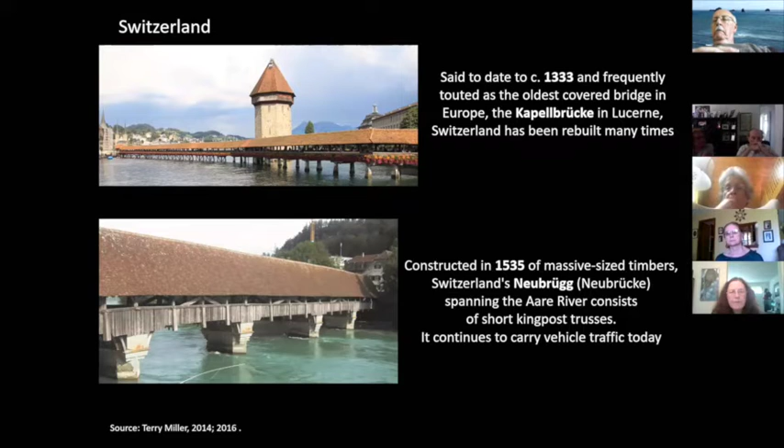Now, probably the two most celebrated covered bridges in Europe are in Switzerland, but Switzerland has more covered bridges than any country in Europe, even though other countries like Germany, the northern part of Italy, Austria, the Czech Republic, and Romania all have covered bridges today. These are not as well known or as well studied as North American covered bridges.

It may come as a surprise to you that actually the first evidence of covered bridges in the world is in China. We have archaeological evidence in China of a covered bridge 2,000 years ago. That's a long time ago.

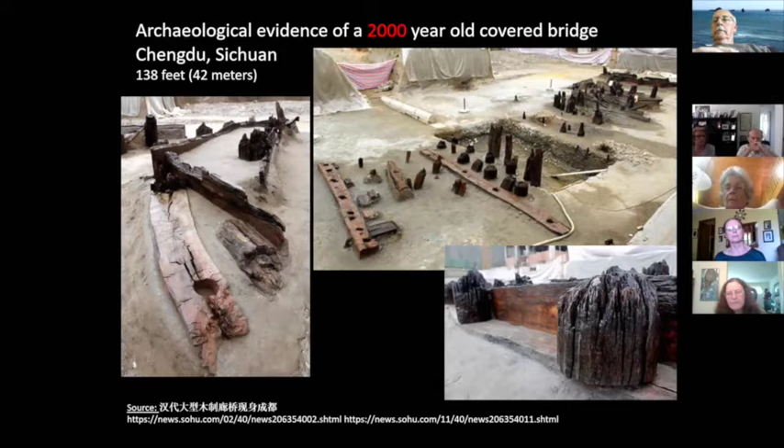I should tell you, my specialty really is Chinese covered bridges, and my book on China's covered bridges will be out in the United States sometime later this month. The earliest covered bridges emerged in China. This is archaeological evidence. Now, the oldest covered bridge in China actually dates to 1490, the end of the 15th century.

Now here, let's get to North America. It's debatable as to how many covered bridges there once were in North America. Some bridges were built, they were destroyed, they were rebuilt, they were destroyed, they rebuilt again. So there are many generations of some bridges, but some experts say there may be as many as 10,000, some even say 15,000 covered bridges built in the United States and Canada.

Well, first of all, you're going to say, Canada? Canada has covered bridges? Yes, Canada has quite a few covered bridges.

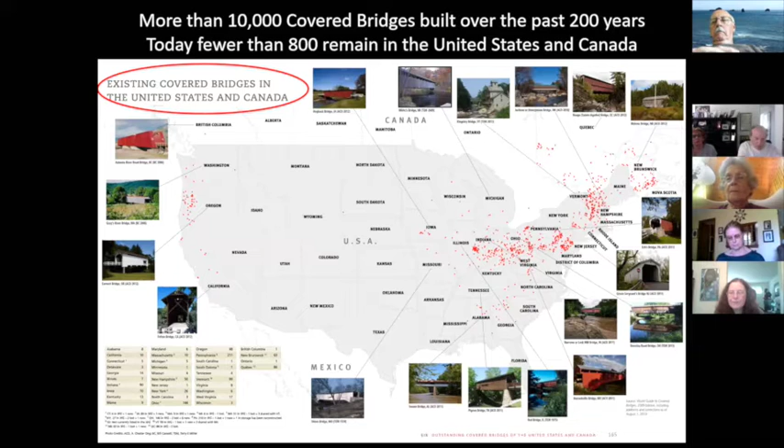And while I've done this with audiences in the past, I've asked them which state has the most covered bridges. Most Americans, almost anywhere that you are, will say Vermont, New Hampshire, something of that sort. But actually, the most covered bridges are found today in Pennsylvania and Ohio. Vermont comes third, Indiana has a lot, and New York has about 33 of them.

There are two provinces in Canada that actually have covered bridges, Quebec and New Brunswick, with 86 and 63, really quite a few. And you can see these dots on this map that show the contemporary distribution of covered bridges in the United States and Canada.

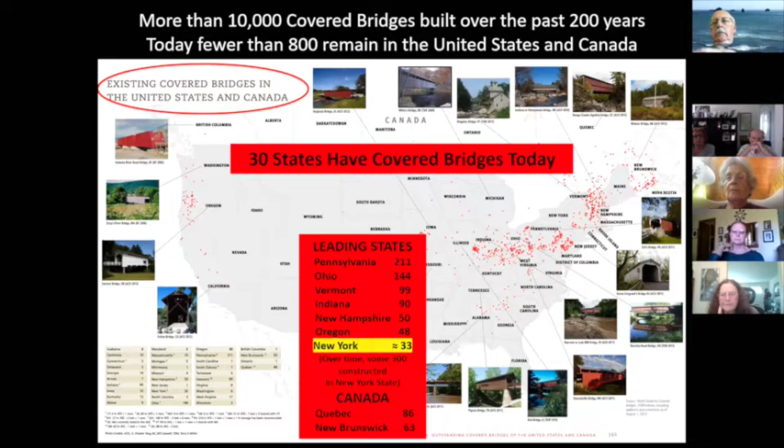And there are 30 US states that have covered bridges. Some of them only have one. And there are 4 Canadian provinces that have covered bridges. So covered bridges are found everywhere, but there are an awful lot of Americans who have never seen a covered bridge. I'm sure all of you have seen covered bridges.

The specialists I know in Ohio have said, well, we have more documented covered bridges because we have looked harder for our covered bridges. So they have found records of covered bridges that help account for this number, while other states like Pennsylvania and New York have really not accounted for their covered bridges in the same way.

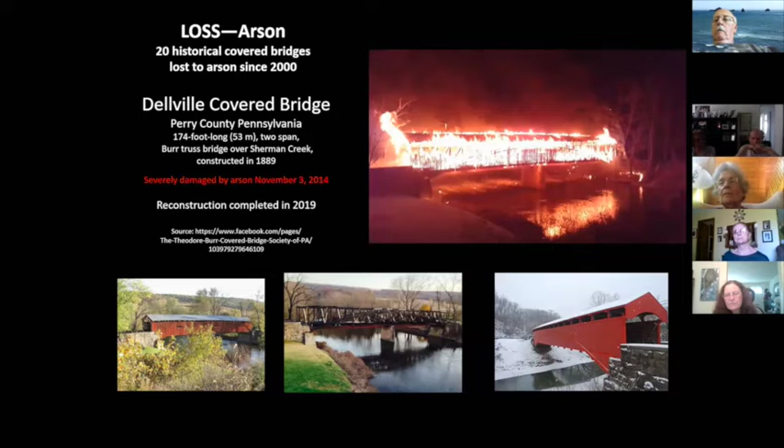Here's a picture of a Pennsylvania bridge that was lost to arson. This bridge was severely damaged in 2014 and rebuilt in 2019 at great cost. Something like 20 historical covered bridges in the United States have been lost to arson. I doubt whether any of the remaining covered bridges in Sullivan County have fire retardant on the outside, though it's possible to get fire retardant paint that helps reduce arson damage. Once a bridge is lost to arson, the cost of replacing it is very, very high.

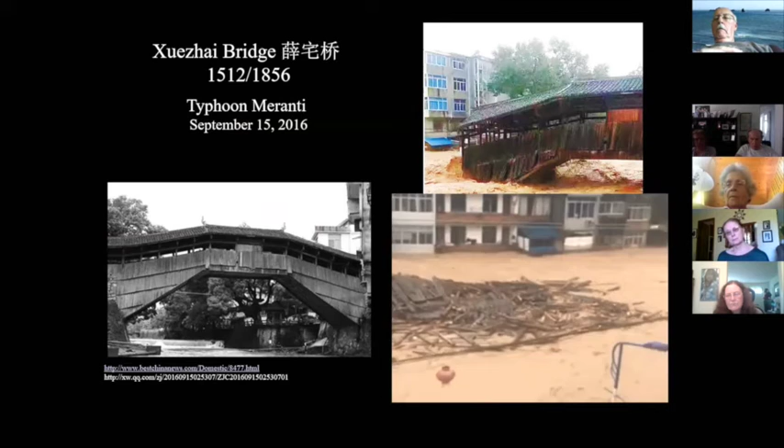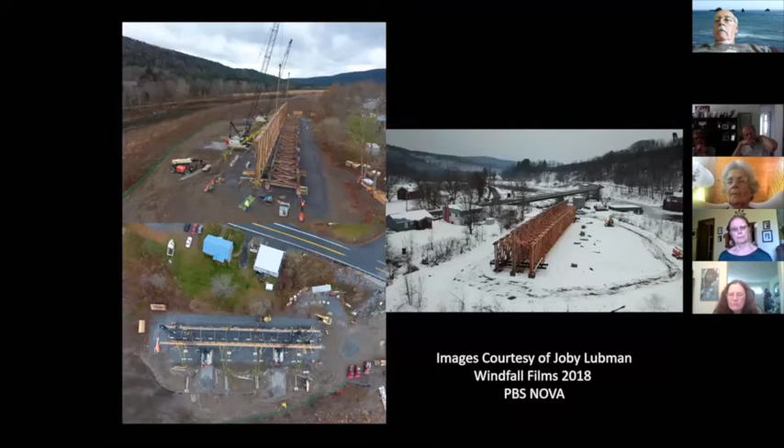This is when it was lost in 2011. Many will remember Tropical Storm Irene, which caused terrible damage in Ulster, Sullivan, and Schoharie Counties. In this case, it simply lifted the bridge up, carried it downstream, where it struck another bridge and was lost. The people in Schoharie County were devastated. Many wanted it rebuilt, but the cost was so great that FEMA objected. Ultimately, with a lot of political pressure, it was decided to rebuild the bridge, and it was rebuilt in 2018.

It looks like this today. It's a bypass bridge, meaning it's just for pedestrians now. It's been raised, so it's unlikely to be washed away again. This series shows you how the face, structure, and nature of a bridge can change over time, sometimes well documented and sometimes not.

Now let's step back. How did people approach bridges, streams, creeks, and rivers in the past? Well, fording was very important. Some of you may live in towns, as I do in New Paltz, where we have an old ford road that leads to an old ford.

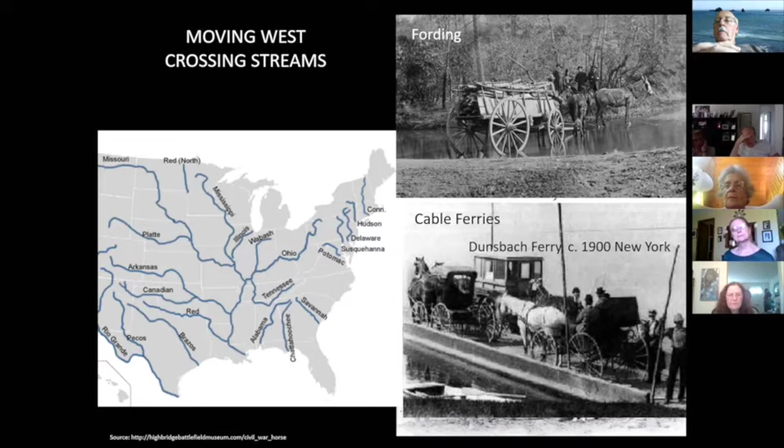There was, about the same time, the building of canals. We'll link some of this a little bit later.

Now, along the way, and you can find a lot of information in historical records about this, where people did not want to ford a stream, they began to build so-called beam bridges, simply taking a log, laying it across abutments, stone abutments on both sides, and creating a bridge that served a necessary purpose, and that if it got washed out, it could be replaced fairly quickly. And these are found all over the United States, not just simply in the Northeast, but all over the United States.

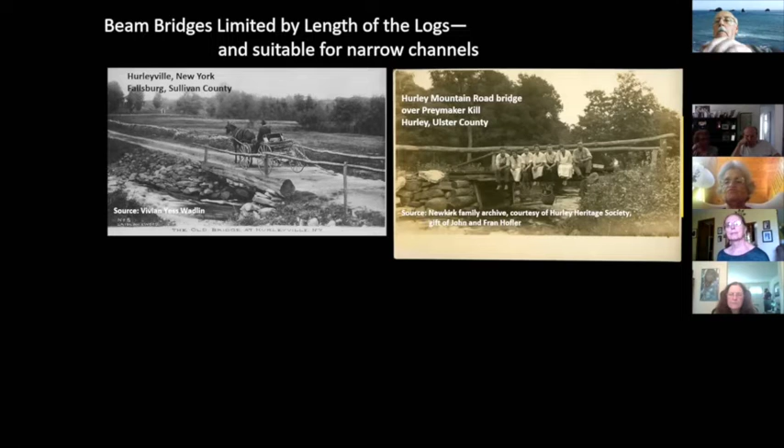Now, a fact of the matter is, trees can grow to great heights, but it's very rare to find a beam bridge that has a beam as long as, say, 60 feet, let alone 100 feet. Most beam bridges did not exceed anything more than about 30 feet. And beams sagged, beams rotted — nature conspired against using beams over a long period of time.

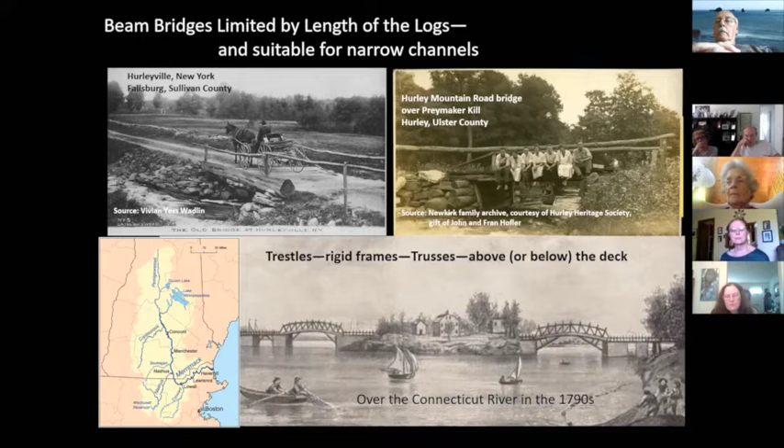Now, in the latter part of the 1700s, the 18th century, in New England, there were some individuals who began to experiment with ways of spanning a greater space, greater distance than, say, 30, 40, or 50 feet. And they did this by working with something that had been known very clearly in Europe. Carpenters knew this because they employed it in barns, churches, and the like, and that was using timber trusses. Timber trusses basically are structures put above a beam utilizing triangles to support the beam. Some people say to lift the beam.

And these are some of the common trusses on the left that were used: the so-called king post truss, the queen post truss, and the multiple king post truss. These were used widely in the world. Nobody invented them — they have been around a long, long time and employed by carpenters.

Then in the early part of the 19th century, American carpenters, who were very creative and inventive, began to design new types of trusses that would allow greater expanses to be covered than the king post, the queen post, or to some respects, the multiple king post. Each of these typically has a name. Some of the best known are shown here: the Burr truss, the Child's truss, the Howe truss, the Pratt truss, the Long truss, and the Town truss. We're going to see a lot of Town truss in Sullivan County in a while.

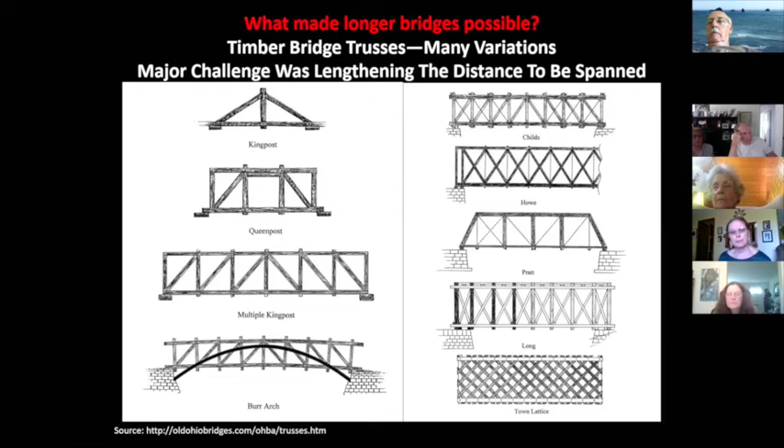Now, each of these trusses not only had a name, they were patented. In other words, those individuals went to the US Patent Office and patented their design with the expectation that those who would use their design would send some kind of royalty back to them. The fact of the matter is that a lot of the patents were ignored, and even if a carpenter was reasonably honest, he would tweak the design and say that it was his and it wasn't patented.

Now, it's useful right at this point to ask: why are covered bridges covered? Here's a picture of a covered bridge being built, the cover being put on. And the purpose of that cover, fundamentally, is to protect the truss. If there's anything you take away from the talk today, it's that covered bridges are covered to protect the trusses. The trusses, the timber trusses, were the most expensive part of the bridge.

While it was debated in the early part of the 19th century whether covering the trusses would protect them or lead to deterioration, people quickly came to believe that a timber truss bridge that might only last 10 or 20 years uncovered could last half a century or a whole century with a cover. So the cover was put on the bridge to protect the timber truss.

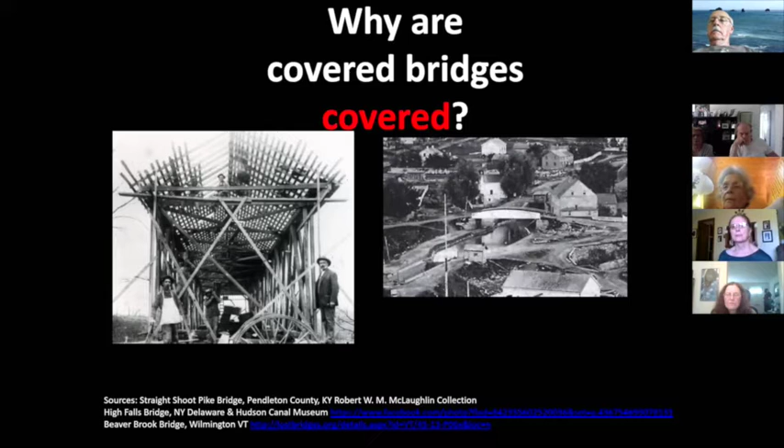Now let's look at this. This is a bridge, and it looks like it has sides. Actually, covered bridges typically have sides and a roof, but you can't really see the roof until you zoom in. When you zoom in, you see that this particular bridge has sides but no roof.

That actually happens to also be a covered bridge, called a boxed pony truss covered bridge. There are lots of those, and even some in Sullivan County. They no longer exist in Sullivan or Ulster County, but along the D&H Canal there were something like 30 of these at one point between 1828 and the end of the century.

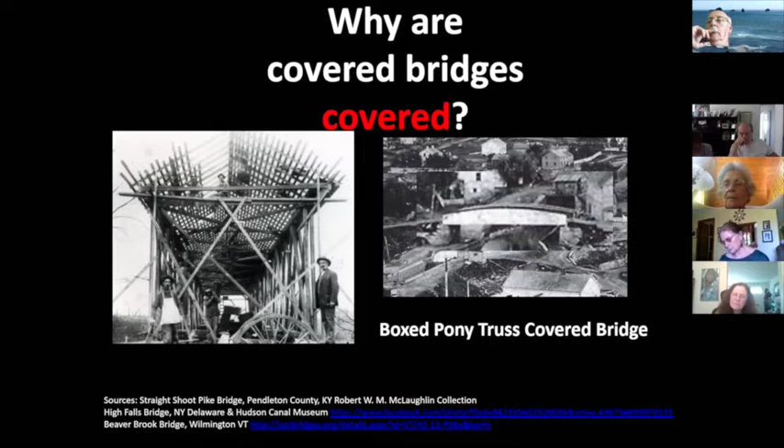Take a look at this bridge. This is also a boxed pony truss. The trusses are covered—it's a king post truss—and there's no roof, but it's still a covered bridge. Specialists who focus on covered bridges see this as a covered bridge.

Now, is a roof necessary in a covered bridge? No. But most covered bridges we see today, virtually all of them, have a roof. Still, there are quite a few pony truss covered bridges in the United States that do not have roofs.

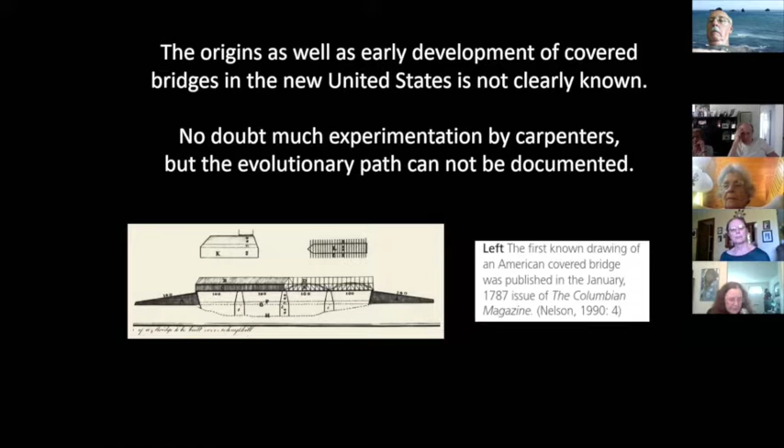Nobody has yet figured out when the idea of a covered bridge first began to emerge in the United States. Historians have found that there's a drawing of an American covered bridge dating to 1787, but there's no evidence that bridge was ever actually built. The first documented covered bridge simply dates to 1805.

Now, bridges come at different lengths. We're going to see a couple of them, 200 or so feet, in a while. I don't know if any of you can imagine there were covered bridges in the 19th century that were more than one mile long. This particular bridge, to the south of Harrisburg on the Susquehanna River, a very wide river, was first built in 1814 as the first covered bridge there.

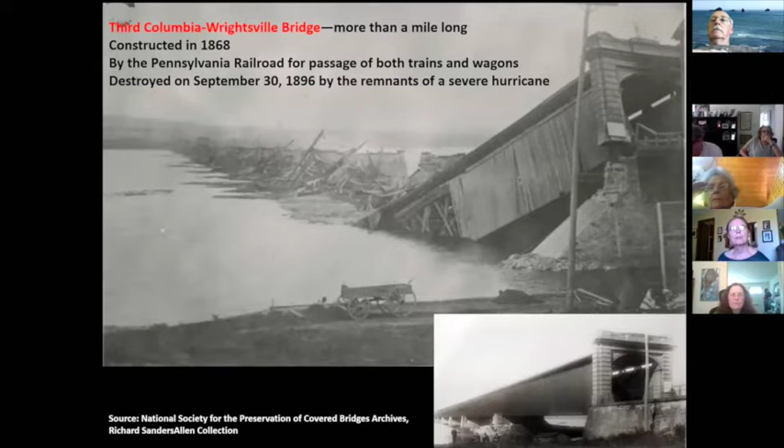Tragically, it was burned during the Civil War in an attempt to stop the movement of Confederate troops between Columbia in Lancaster County and Wrightsville in York County to the west. A fire was started with no expectation that the bridge would be completely consumed, but it was. It was rebuilt, and that rebuilt bridge was then destroyed in 1896 by the remnants of a hurricane.

Now, let's get to New York State. Now that we have a national, or at least a northeastern, reference point for covered bridges, we'll look at New York. No one knows exactly how many covered bridges ever existed in New York, but those who specialize in New York say it's more than 300. I suspect it's a lot more than 300—we just haven't been able to do the county by county research to tell us exactly what's there.

Why, you might ask, is it difficult to do county by county research? Well, a friend of mine who worked more than 40 years ago in Ohio dealing with county records was dealing with musty records kept in containers in the basement or attic of a town hall. In many cases, towns simply destroyed their records because they were too old, the paper deteriorated and the like. But if they were there, it was possible to get through them.

In Ulster County, we're pretty lucky. We have a lot of records that are available, and in New Paltz, a lot of our records, not all, but a lot of them have been digitized, and we can go back and look at them.

It appears as if in the Mid Hudson region, in Ulster, Sullivan, Dutchess, and Orange... I think you guys who live in Sullivan County consider yourself in the Mid-Hudson. Certainly those of us in Ulster do. We learned recently, with the governor's plan, that the Mid Hudson Valley also includes Westchester, which is sort of upstate and the like. Typically in New Paltz, we don't think of Westchester as being part of the Mid Hudson. We can consider Greene County, Delaware County as being in the Mid Hudson.

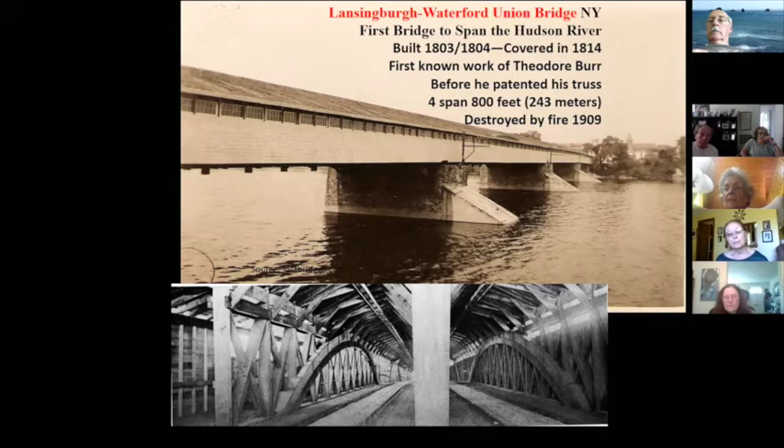And this was even before he patented his truss, and down below here you can see the truss. It's a very sophisticated truss. As we can see, it's a 4-span, 800 feet long bridge. The bridge functioned pretty well until 1909, when it was lost to fire, and then it was replaced by a historic iron bridge.

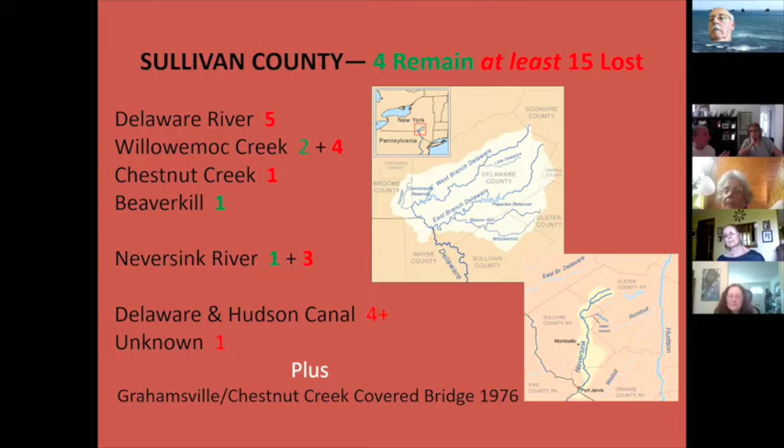At the very bottom here, I show the Grahamsville Chestnut Creek covered bridge, which was built in 1976. That, however, is not yet considered a historical bridge. Typically a historical bridge has to be around for 50 years, and this one hasn't quite reached that, but it's only a few years off. It'll be 50 years old soon and then can be considered historic—which makes many of us historic as well.

Perhaps I'm like many of you—I had come down Route 17 many times and saw the sign to Bridgeville and never got off, always wondering what was there. I'll show you in a little while. Finally, earlier this year, about a month ago, I got off there and found some very interesting things concerning the former Bridgeville Bridge.

Now, I don't think these cement structures were there for the 1807 bridge, unless the 1807 bridge was later in the 19th century raised for some reason, and then these cement abutments were put in. I don't have an answer to that yet, and Alan doesn't either. This is what the iron bridge that replaced it looks like, and when I look at the abutments from here, it does look like they're the same abutments. But I don't have definitive proof on this yet.

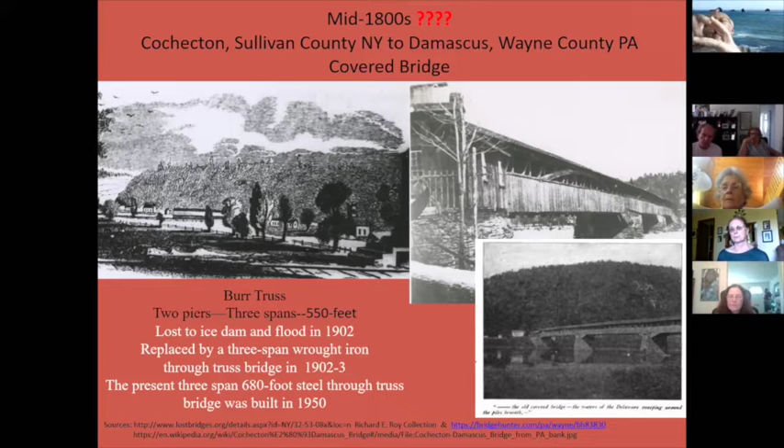Now let's look at a couple of the bridges that are still there.

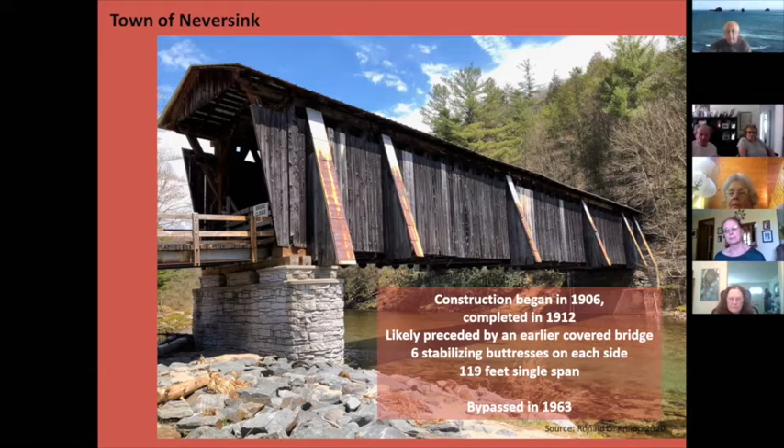Now, I thought I put this in here, but I did not. Just a few years ago, the abutment on this end, on the left-hand side, was washed out so badly that it looked like, with a little more effort, the bridge would collapse. People associated with the New York State Covered Bridge Society and local people in Sullivan County got the county to rebuild the pier that serves as an abutment at the end of the bridge, to stabilize it so it's not lost.

Inside, it's also a town lattice truss, which is in very good shape. I looked into the bridge when I was there two weeks ago. It was very dark, but my iPhone picked up very nice pictures on the inside.

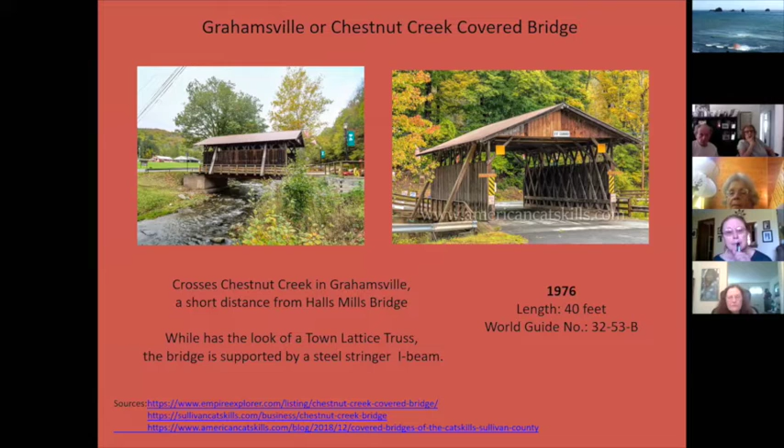Now, the Grahamsville Bridge, as I said, was built in 1976. It also goes into a park. While it does not show clear buttresses on both sides, it shows supports on both sides and walkways on both sides.

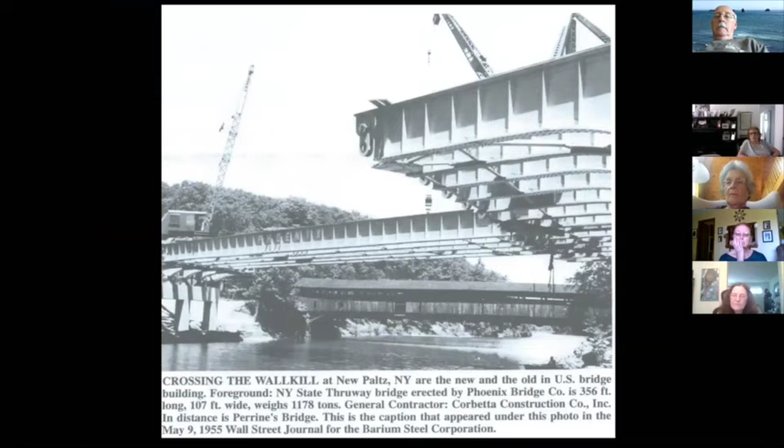Some people say the Perrine's Bridge is viewed by more Americans than any bridge in the whole country. That's probably true if you consider seeing a bridge for one or two seconds while traveling at 65, 70, 75 miles an hour—you see it, now you see it, now you don't. Many people told me they saw it and then tried to find it again and never could. But it's not all that difficult to find.

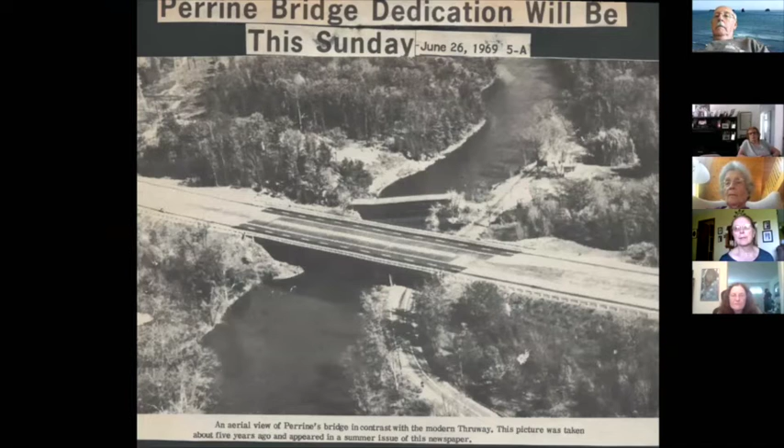Here's a picture of it when it was rededicated, with the New York State Thruway there as well.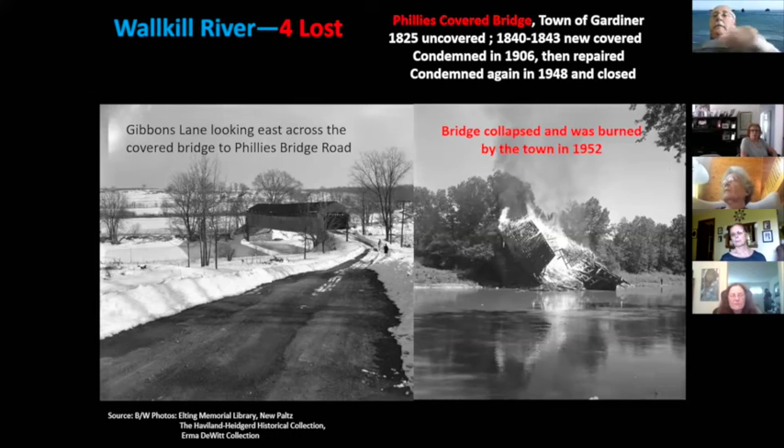One of the sad bridges we have was in the town of New Paltz, now it's in the town of Gardiner, called the Phillies Bridge. We have a Phillies Bridge Road, but there's no Phillies Bridge on Phillies Bridge Road. That's because the bridge was condemned in 1948 and closed, and the town, concerned about liability issues, built a fire and burned it.

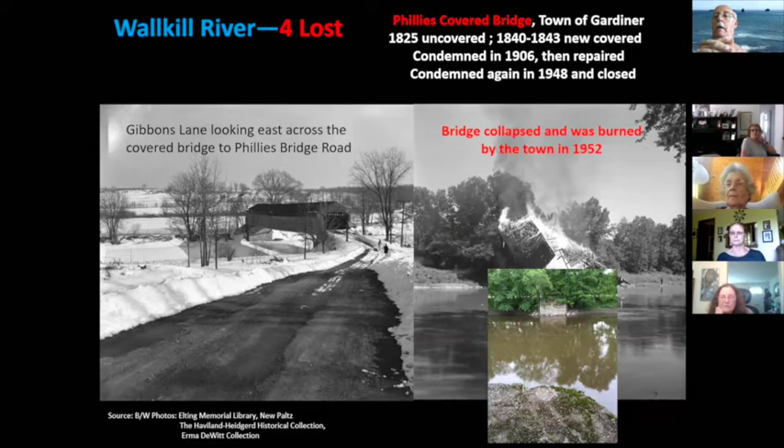So we have pictures of the bridge taken by Erma DeWitt, and pictures of it when it was burned in 1952. I've been to that bridge site because I'm interested in the abutments, and those abutments you can see are actually on the site of the home of an actor whose name has just left me—I'm sorry, it'll come to me in a minute—who has his house on the other side.